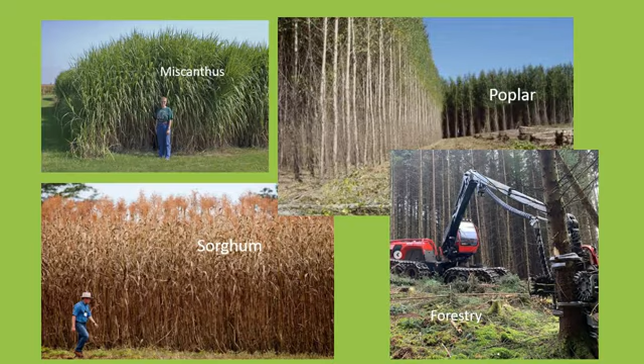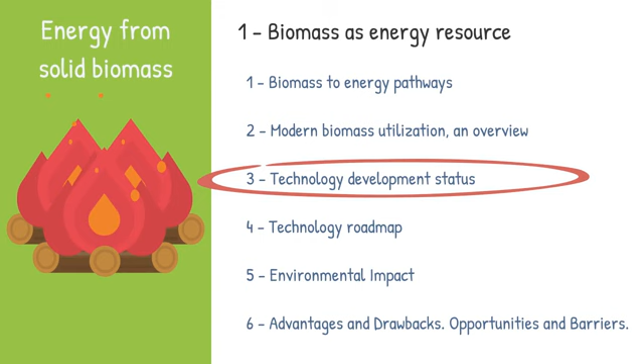Biomass is expected to play an important role in the coming future in the transition to a low-carbon economy. The pathway to convert biomass feedstock into heat and electricity covers a wide range of technologies. The previous lesson covers the development status of the technology. For simplification, we considered only 3 levels for technology development.

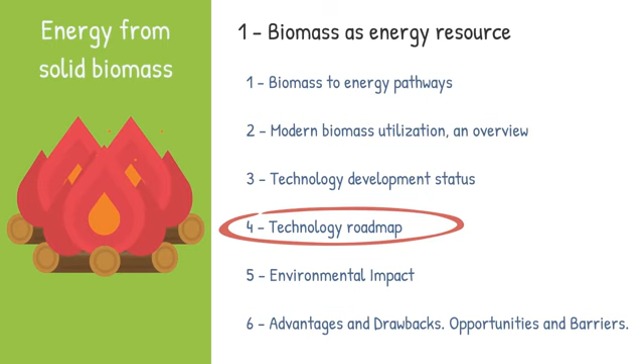Let us now analyze the recommendations of the International Energy Agency and other organizations for the development of new products and technologies. There are many publications and a lot of information about what role biomass should play in the future. We have selected for you some clear guidelines.

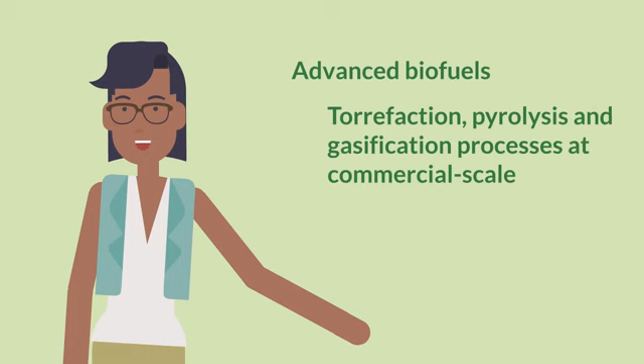Development of advanced biofuels. Development of torrefaction, pyrolysis, and gasification processes at commercial scale. Development of high-efficiency bioelectricity. Development of innovative biorefinery concepts. Adapt carbon capture systems to biomass systems.

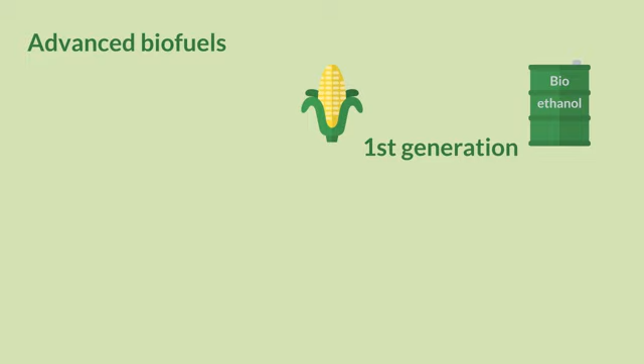Develop advanced biofuels, with improved efficiency of conversion and lower costs. They are also referred to as second or third generation biofuels. They are based on non-food crop feedstocks. Their main advantages are not competing directly with food and feed crops for agricultural land, or causing adverse sustainability impacts, and being capable of delivering significant life cycle greenhouse gas emissions savings compared to fossil fuel alternatives.

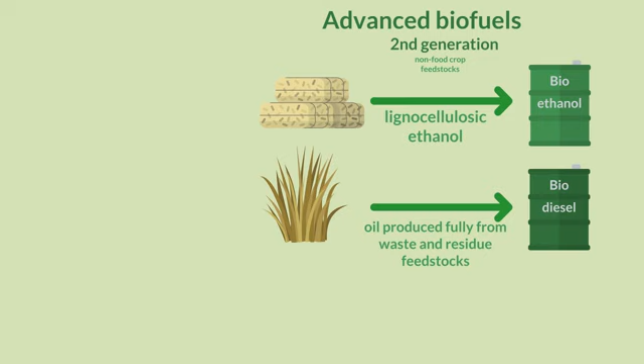Related technologies include lignocellulosic ethanol, hydrotreated vegetable oil produced fully from waste and residue feedstocks, biomass to liquid, and biofuels produced from innovative feedstocks such as algae.

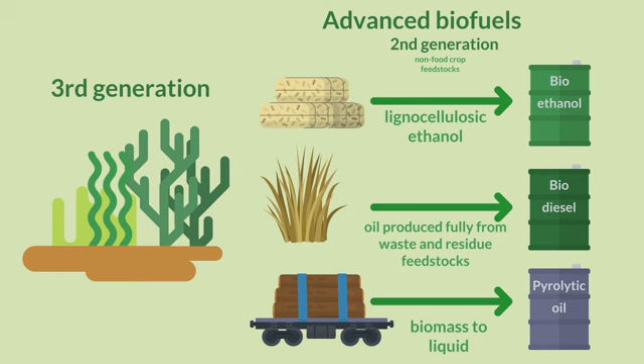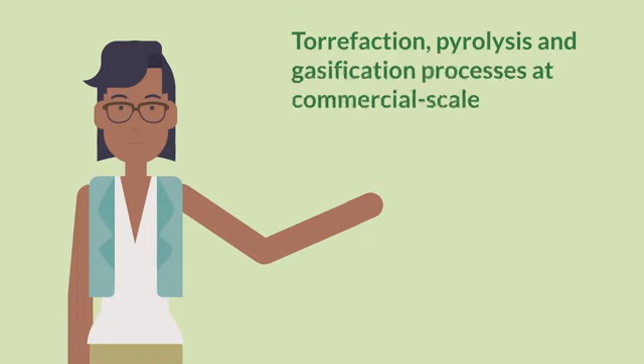The next recommendation is to develop torrefaction, pyrolysis, and gasification processes at commercial scale. This includes pre-treatment processes to reduce ash content and produce higher quality fuel through pyrolysis and torrefaction, with associated washing of the torrefied material. Pyrolysis oil, also referred to as bio-oil, has about twice the energy density of wood pellets, making it viable for long-distance transport.

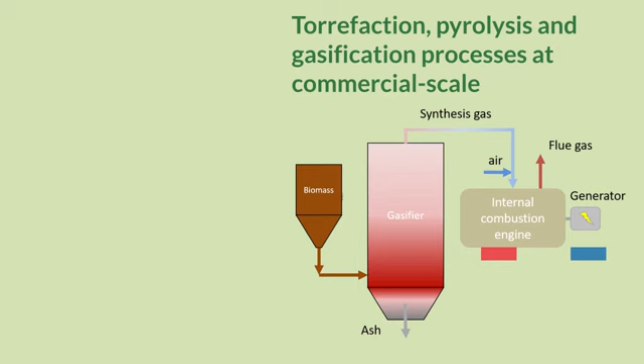Biomass gasification should also be considered as one of the technology choices for converting distributed and low-value lignocellulosic biomass to gaseous fuel for generating heat and electricity or cogeneration. After feedstocks and products, the International Energy Agency focuses on improved processes.

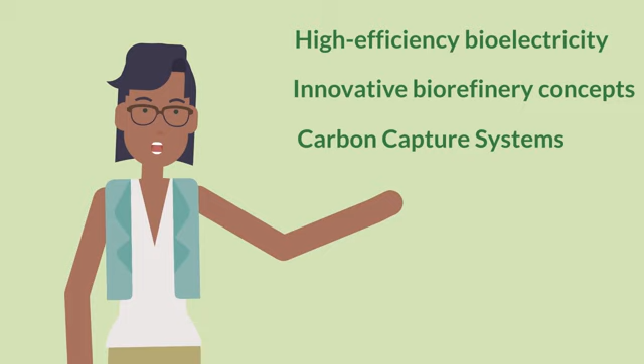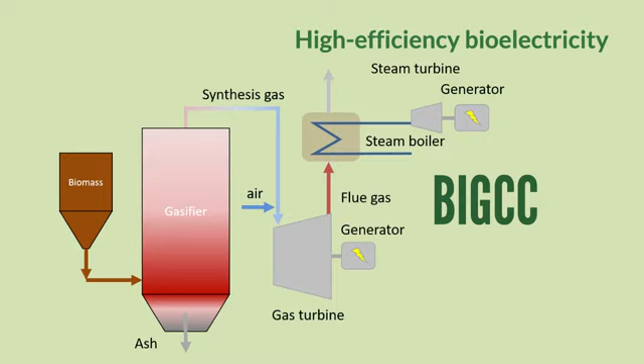The first recommendation is to develop high-efficiency bioelectricity generation systems. At a large scale, there is potential for high generation efficiencies from BIGCC plants, similar to those now being developed principally for use at a large scale for coal. Developing cost-effective designs for such plants at scales matching biomass availability may be challenging.

After the improvement of electricity production efficiency, the next recommendation is to create products in an innovative way. To achieve that, the International Energy Agency recommends developing innovative biorefinery concepts. The biorefinery concept is analogous to the basic concept of conventional oil refineries, to produce a variety of fuels and other products from a certain feedstock.

The economic competitiveness of the operation is based on the production of high-value co-products in addition to comparably low-value bioenergy, including biofuels. And finally, the recommendations focus on the reduction of CO2 emissions. Developing optimal configurations to integrate carbon capture systems can be a way to reduce CO2 emissions of biomass combustion systems.

So far, carbon capture and storage has mainly been discussed in the context of avoiding CO2 emissions from fossil fuels, but the technology could also be deployed in bioenergy conversion plants. The idea behind bioenergy with CCS is that capturing the CO2 emitted and injecting it into long-term geological storage provides the possibility to remove neutral CO2 from the atmosphere, thus providing negative emissions.

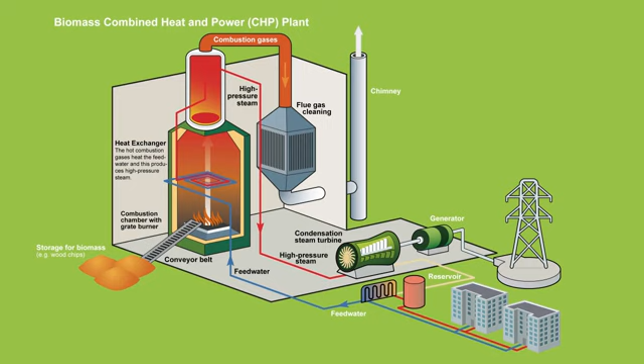Combined heat and power, or CHP systems, take advantage of increasing the energy efficiency when there is a demand for heat to be covered. Let's focus on small-scale CHP systems that can operate under the concept of distributed power generation, the best solution to produce and consume energy locally.

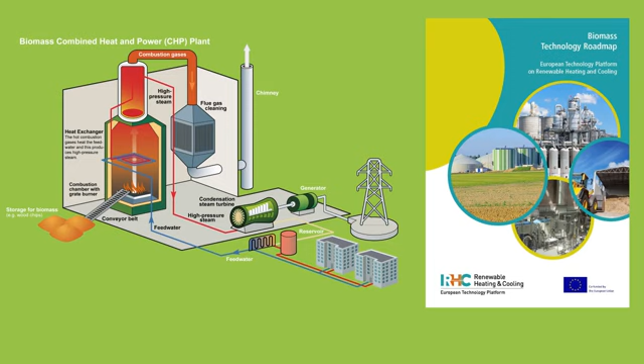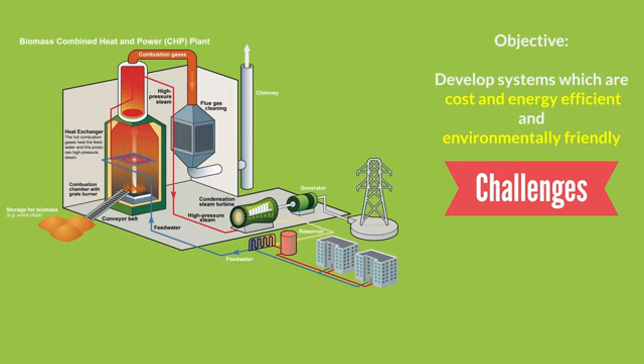For small-scale CHP systems, the European Technology and Innovation Platform on Renewable Heating and Cooling highlights some challenges. The objective is to achieve systems that are cost and energy efficient and environmentally friendly. To achieve these objectives, small-scale CHP systems should...

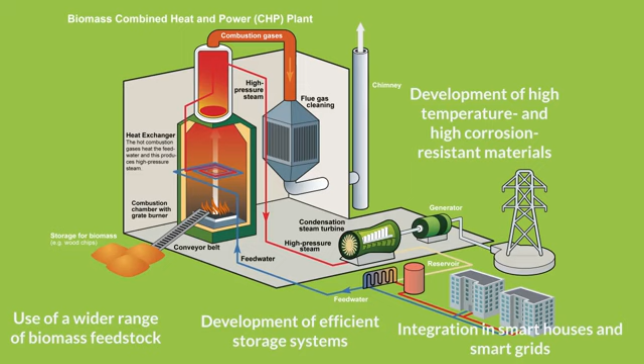Use a wider range of biomass feedstock, development of high-temperature and high corrosion-resistant materials, development of efficient storage systems, integration in smart houses and smart grids, and finally, reduction of investment and maintenance costs.

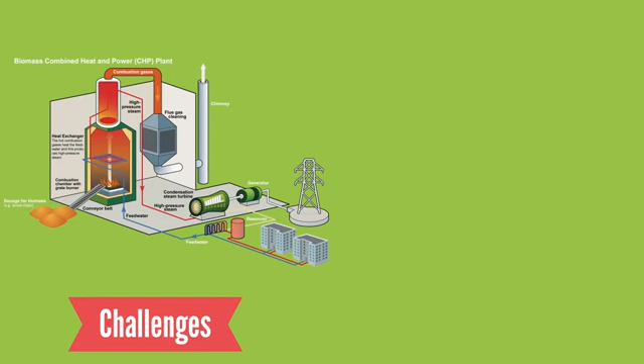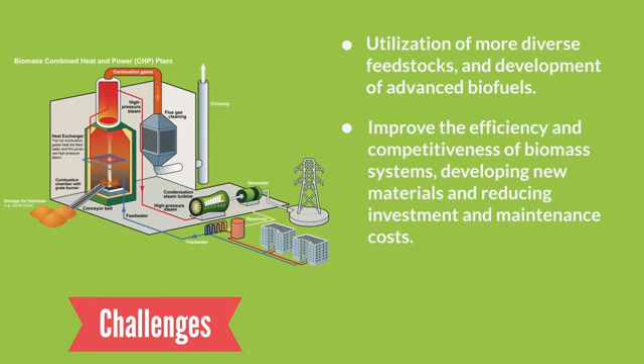Wrapping up. Recommendations given by the International Energy Agency under a global perspective highlight some key milestones for the next 10 to 20 years. Regarding the challenges for future developments, key issues can be utilization of more diverse feedstocks and development of advanced biofuels, improving the efficiency and competitiveness of biomass systems, developing new materials, reducing investment and maintenance costs, and integrating biomass systems into smart grids and smart houses.